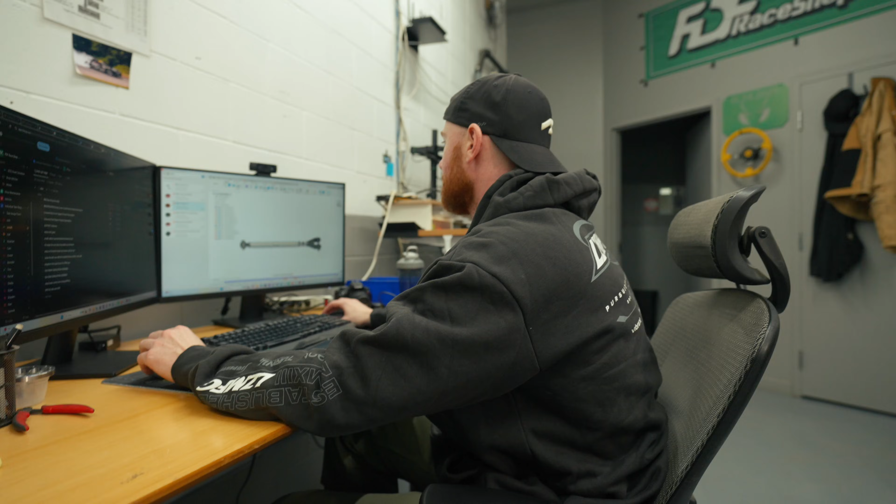Dude, we haven't done a design time since last year. The kids already got on that one. They're like, you haven't pulled us on the sled in a year. The kids even got the jokes.

I'm gonna make a quick axis through this. You could actually film this as part of design time. We might as well actually do something that shows a bit of the design. You're gonna be shown a really big mistake too, which is cool.

I didn't officially build anything, so it's totally fine to run into problems with your designs because you can still fix them, right? So you gotta run through the simulation, make sure there's no interferences, and we found some interferences because I slightly jumped the gun, although I was kind of just trying to get a model in place so that I could use it, but you're gonna find what I'm talking about here.

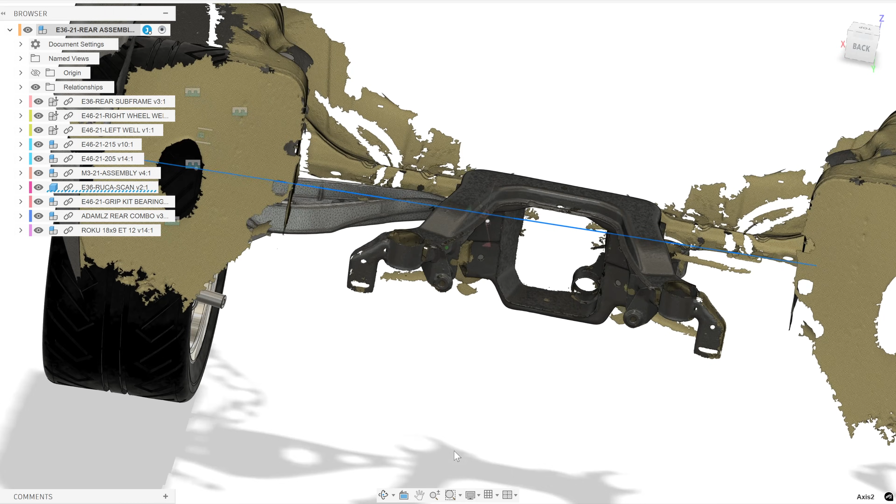We want to have axes traveling through the control arms. And the reason for that is so we can view roll center, converging lines, intersection points, anti-squat, all sorts of things that are gonna look cool and behave so that we can actually follow these and track them and trace them and graph them basically. So I'm gonna just create an axis through this control arm.

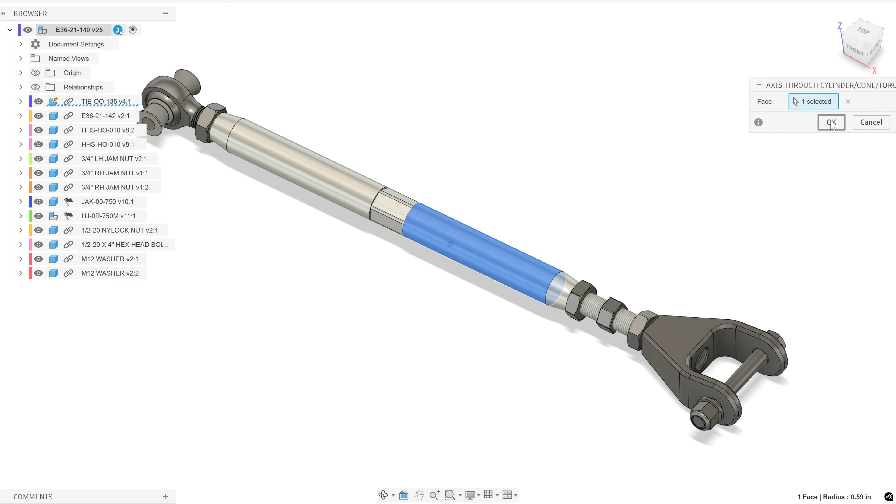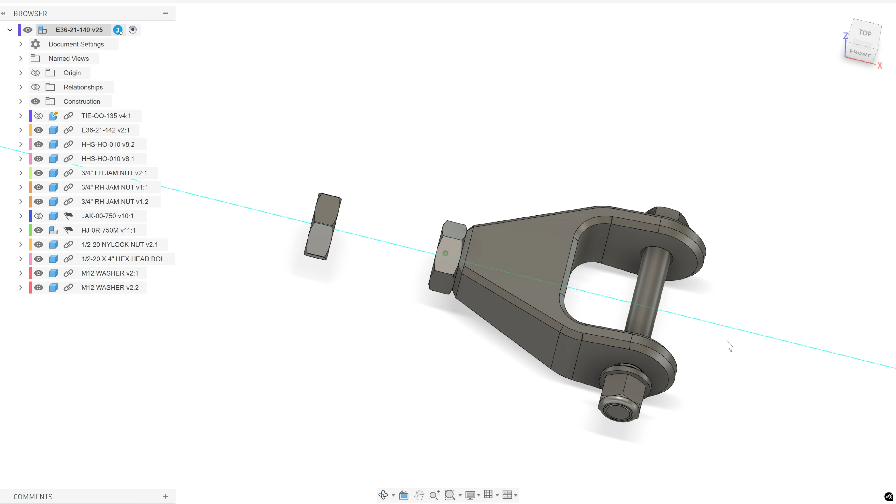Typically, control arms are a little bit harder, like if you're dealing with an OEM control arm and a scan file, but because this arm has many circular parts that are all in line with its axis, we can really simply just put an axis through cylinder, basically like this, and you can see this construction line here. So essentially I can drag the axis longer and we can get our lines. Sometimes it's hard to click on them. There we go.

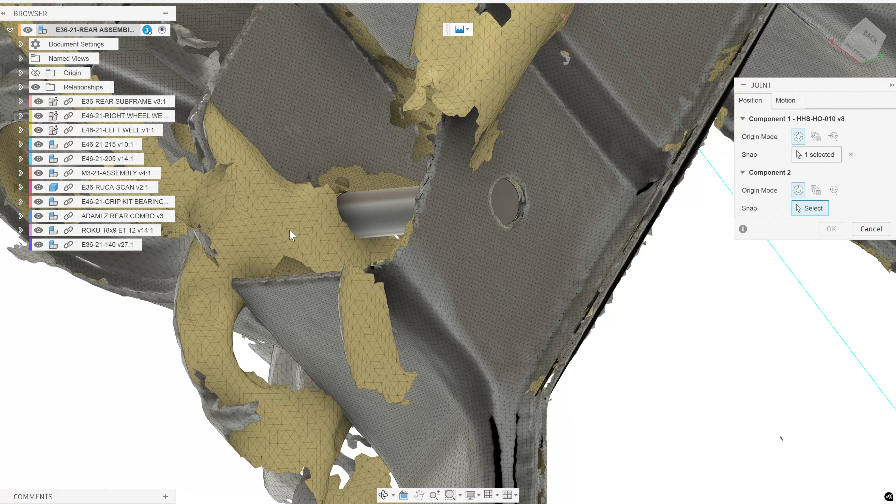Okay, so we have our axis through the line, so we're gonna save that, drop it into our assembly, we bring it over, and we can now joint this control arm as if we were bolting it into the subframe. So we'll put the spacer where it needs to go, here. And then we will put the control arm onto this spacer as if we're bolting her in.

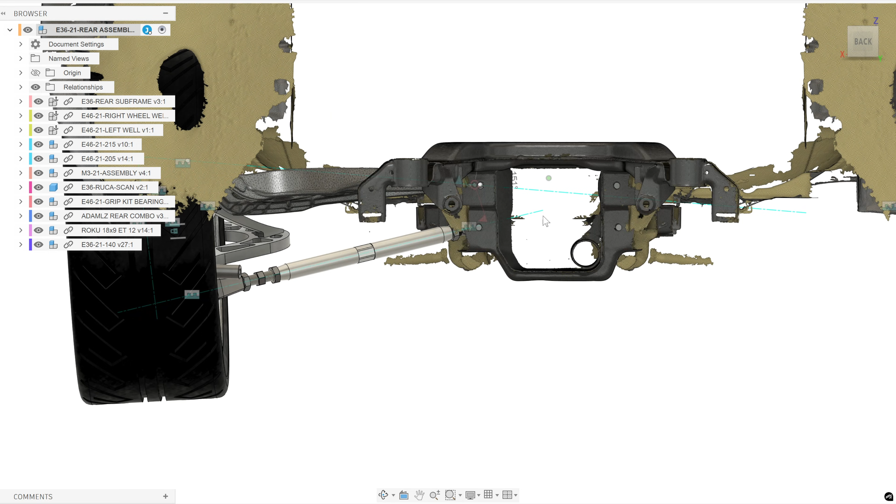And we now have some nice converging lines. And I can just drag them longer. You can see the intersection point here. If I move the wheel, we can easily track where everything's going. Cool, very cool. You can see how the BMW behaves.

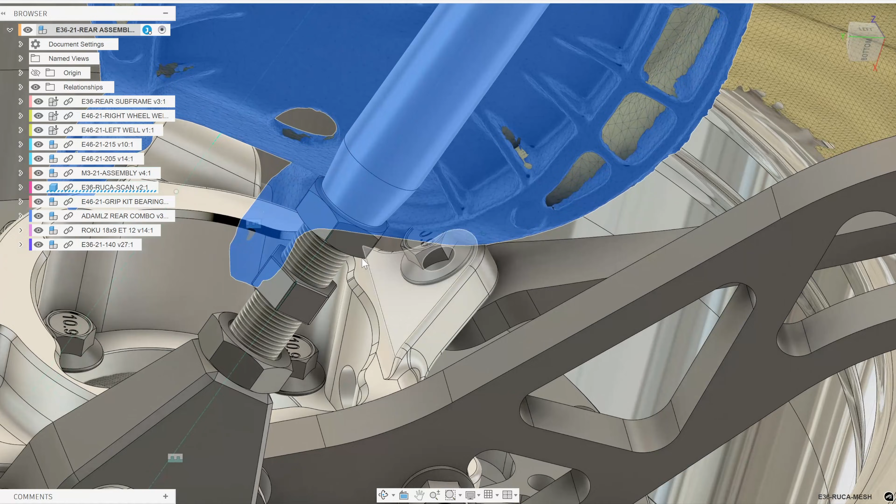But the problems, like I said at the beginning, we have a couple interferences. We have this slight interference with the upper, which our upper control arm cleared perfectly fine, but Adam runs the OEM upper and he intends to continue to run the OEM upper, and look at that. The OEM one doesn't clear. So this, boys and girls, is why you gotta simulate way more than what you think in order to have the result you want. The other thing is this interferes as well.

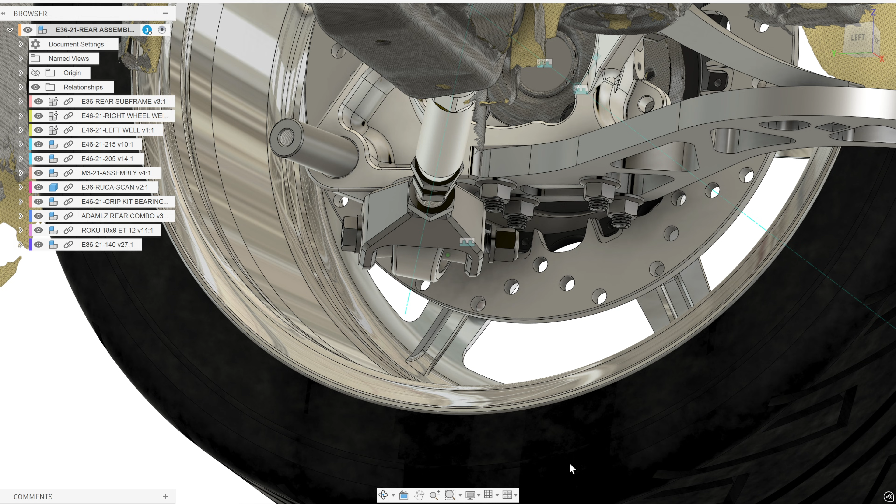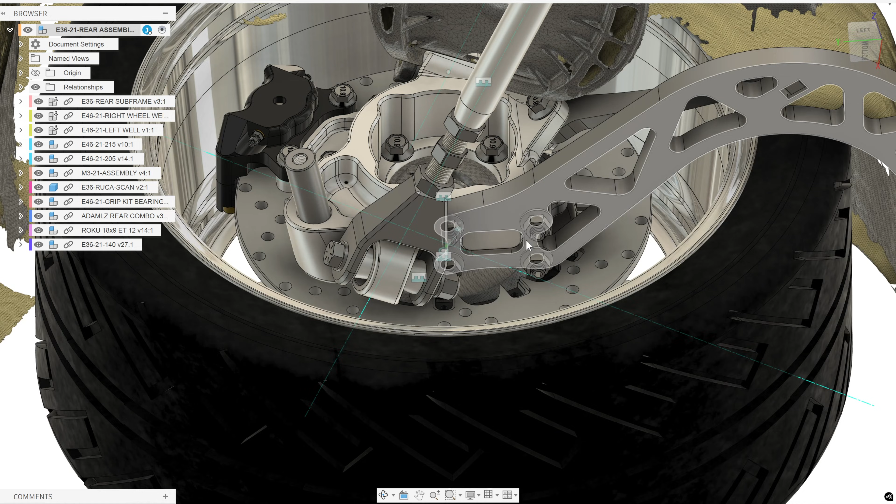Now, because this is on an articulation, if this was a bushing like it is factory, it probably would be fine because the bushing doesn't have much articulation, so the arm won't rotate very much. But because this is on a ball joint, it will likely run into this, so I have to actually move this somewhere else. I need to move it over in, 10 millimeters or something. So two relatively easy fixes, but otherwise, the whole assembly is really, really nice.

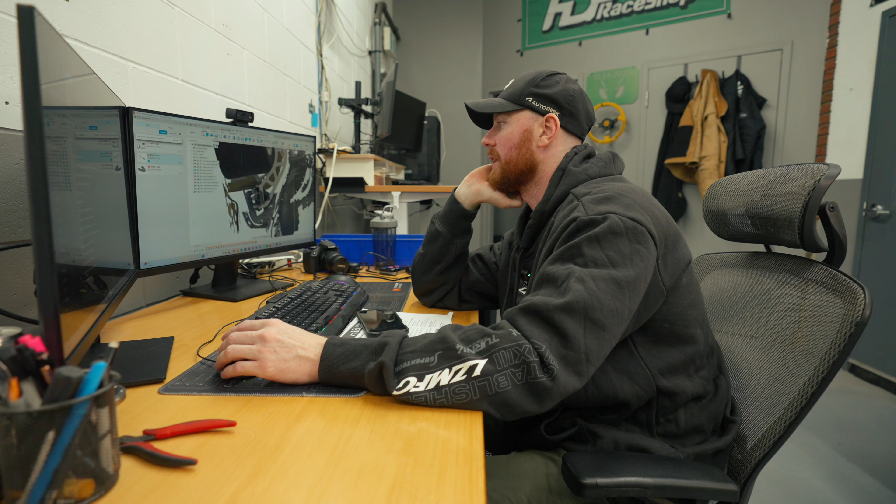We have our toe adjustment point here that has lots of room. We're gonna be able to clear everything. Adam was telling me, or the team was telling me, they prefer to max out the toe arm bucket here all the way toed in, because impacts typically slip these joints anyways. So they want to max this out on the inward position, and then they want to have additional toe from this point.

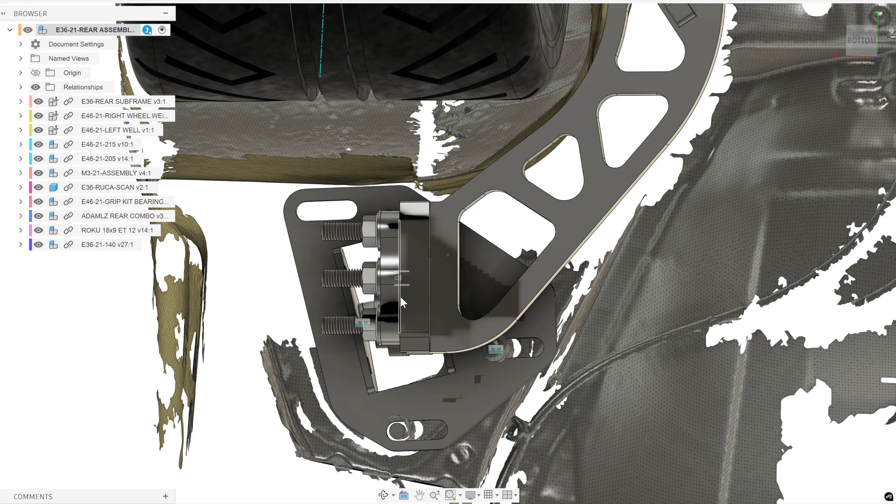So the additional toe, I'm not going to say what they run, but they basically run a fixed point and they are happy with where that is when these are all the way in. So we're going to allow for more toe from there. So if I unlock this, we're able to get that toe adjustment, and you can really see the toe change here.

So that's an additional amount of adjustment that they have, and I'll just relock that because it kind of makes the simulation a little tricky. And yeah, that's basically it.

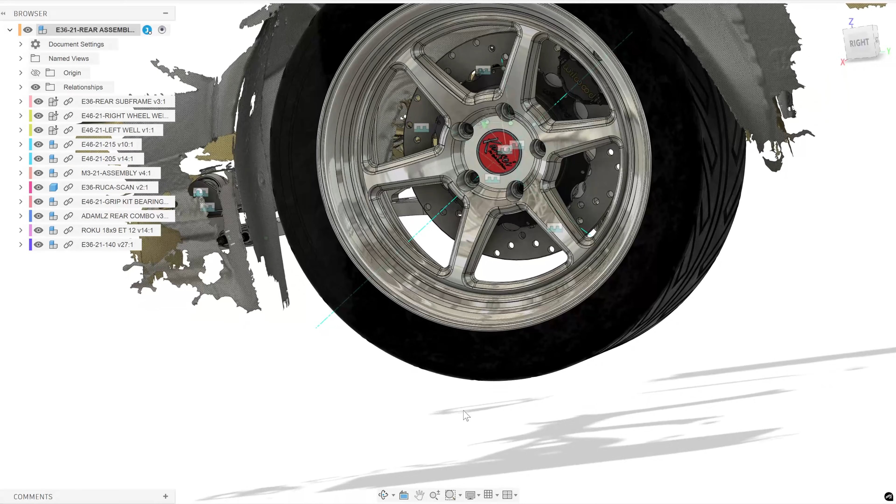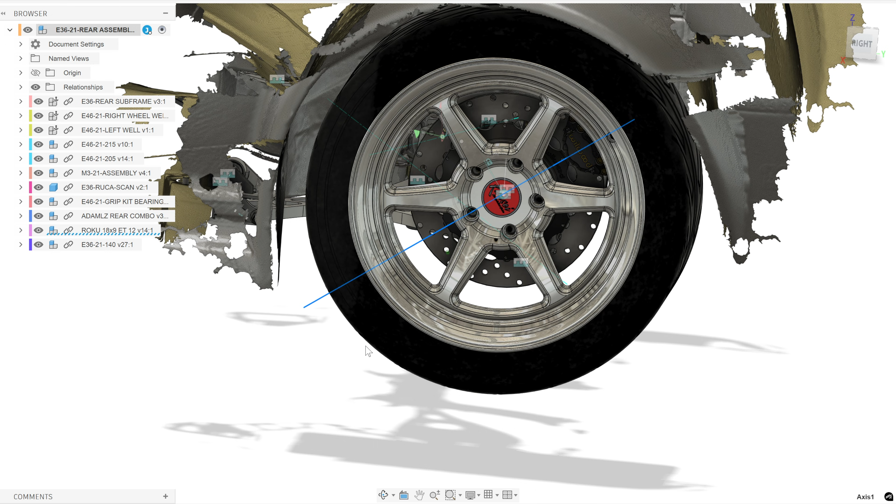One thing I need to figure out how to do, which I will figure out, I just haven't done it yet: I need to somehow have a constraint that keeps the axis of the wheel intersecting the ground plane. I might be able to do this with some kind of a constraint. See this axis here. This is what I want to always point down, so that that's my tire contact position, so that I can trace additional kinematics and find more converging lines.

But I haven't figured out how to. Obviously I would put a revolute constraint on the wheel so the wheel can actually rotate, but I need some kind of a constraint that keeps it pointing down. And because the tire changes camber, changes toe, changes everything, I can't just simply make a contact patch flat with the ground, because it'll never be flat. It'll never be always perpendicular or parallel to the ground. So that one's going to be tricky. I haven't figured out how to do that yet.

I might have to get with the Fusion Autodesk team to come up with an idea. It'd be really great if there was some kind of a gravity constraint where you could just apply an alignment so that this always aligns with gravity. They kind of have that with FEA and other generative design. There's always a gravity function to those, so it does exist, but I haven't been able to figure it out. So I know that may be above some of your heads, but maybe we'll get a comment where somebody's had to do something similar, because nobody's perfect.

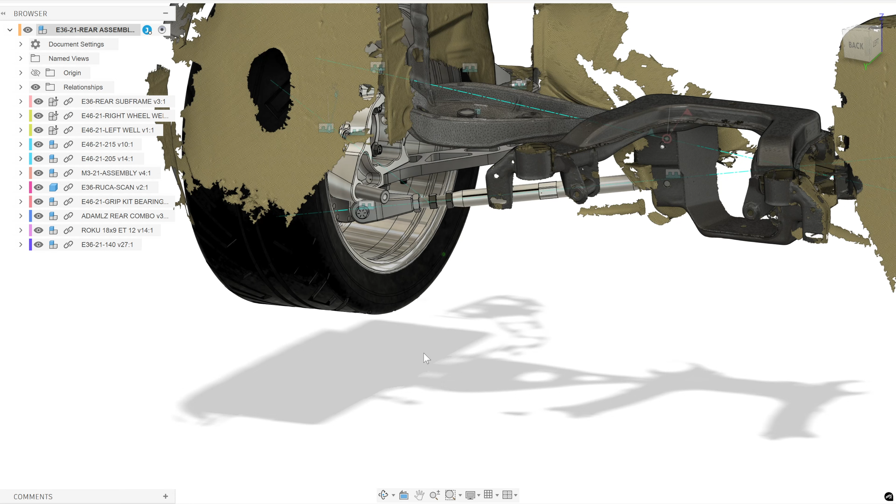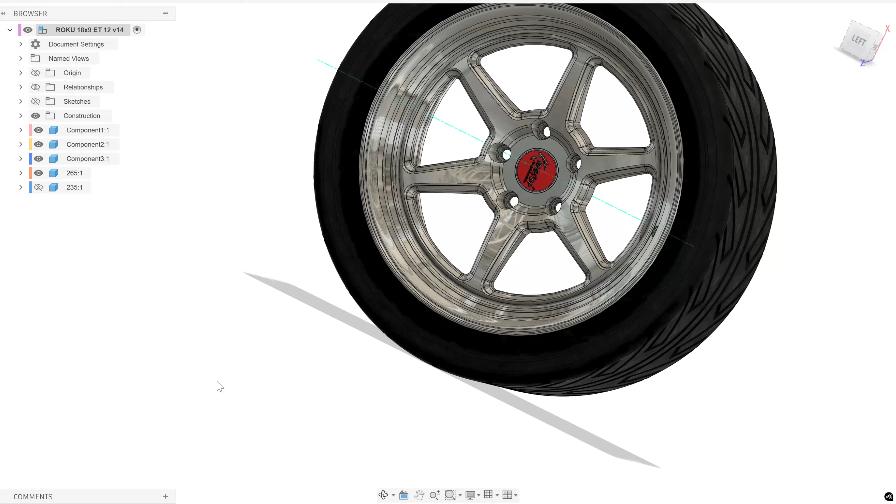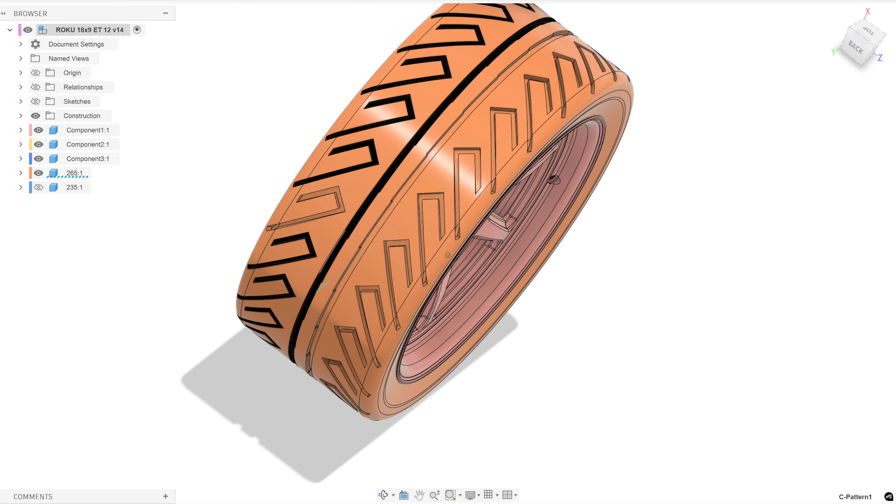As far as other components for design time, we have this wheel and tire. Let's open this up. This is pretty cool, this wheel and tire. So this is a patterned tire, basically went off of the Zeknova tread pattern. And it might be easier if I change the display settings. This is a tread pattern that I just created with a pattern, essentially. A pattern and then a mirror. So that was the easiest way to do that. And so it's an emboss, I had embossed one tread. So if I use the timeline, we can see this better.

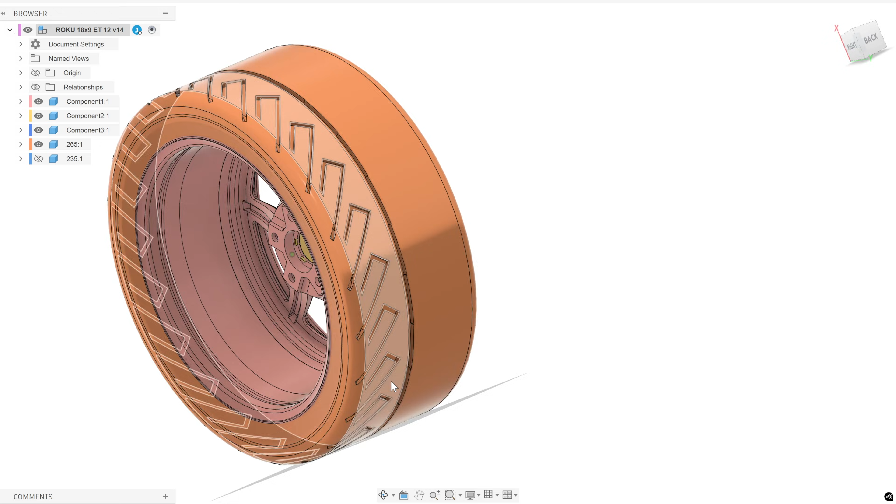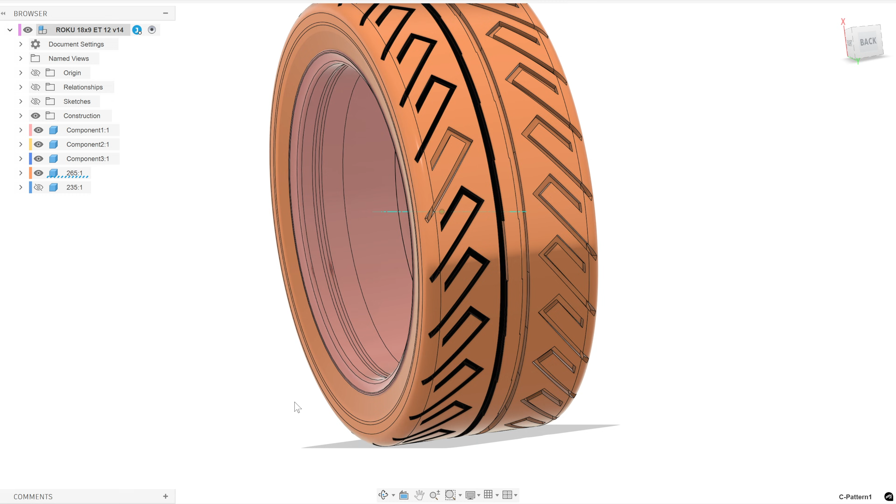So essentially I did an emboss of this one pattern, and then I created a circular pattern. And basically you can just specify how many you want. In this case, 23 is what looked the best. And then I essentially did a mirror plane, mirrored it, and that was it. So if you wanted to make a tread pattern on a tire, it's not that difficult. It's a simple sketch, emboss, circular pattern, and then mirror. Most tires have a symmetrical pattern. I know some do not, but if you want to do the same.

And then for the wheel, this was a CAD file from Kansei, signing an NDA obviously, and we're using Kansei wheels on all of our builds. It's really important to have the model and the size of the wheel, the barrel. We actually had to make knuckles that essentially fit perfectly to their wheels, and their wheels are interesting. They have a larger barrel than usual for an 18. This area offers more clearance, so I was actually able to fit and get some better kinematics out of the Corvette kit due to using these wheels.

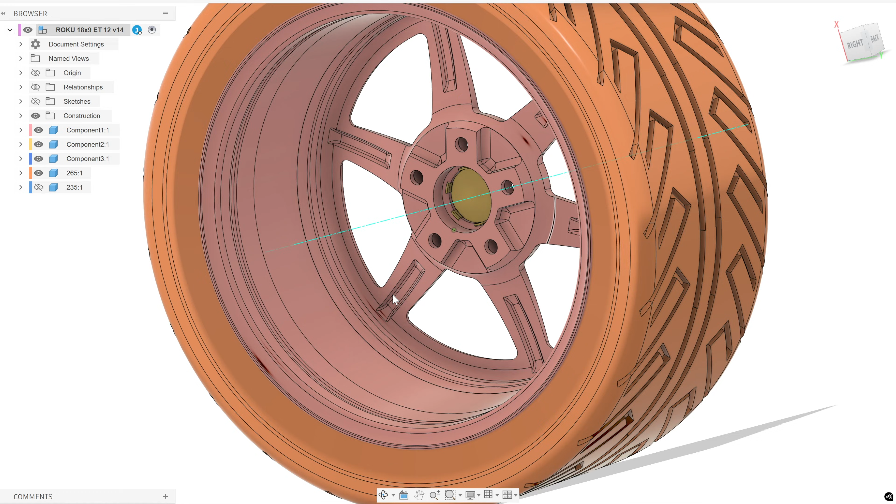And then there are some wheels that you actually can't run on the Corvette Pro kit, which is just an interesting point. I didn't know that until I started messing around with getting the perfect setup, that I think it was a Cosmis wheel won't fit because they use a different type of barrel. I don't know what the actual terms are, but I call this a tapered barrel, where it's got one defined lip for the tire to sit on, and then it's a tapered barrel all the way here, and then you can see it has a bit of a ridge just to keep the bead.

Other wheels have two of these defined ribs, and then they don't have a taper, it's just square in the middle. What are the purposes? I'm not a wheel designer, so I'm not sure. This one I prefer. This one seems to hold low pressures better as well.

As soon as you try to break the bead, it actually takes a while to break off this barrel. But if you have two lips like this, the bead can be broken quite easily. So mounting a tire on a Cosmis wheel or similar style is much easier, both dismounting and mounting, but on a wheel like this, it's harder to mount but it stays on better. I guess if you're a wheel designer, maybe someone like Kansei can comment on why they choose to do certain things for different wheels, I'm not sure. But I'm thankful they do it this way because it works well for all the stuff I needed to get out of the wheel.

I guess I should center this cap. That's gonna bug me now that I noticed it. We can look at this now.

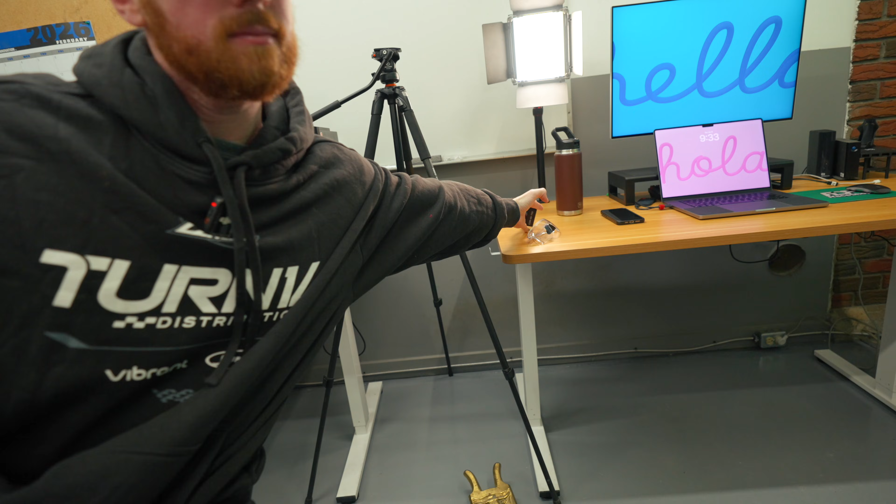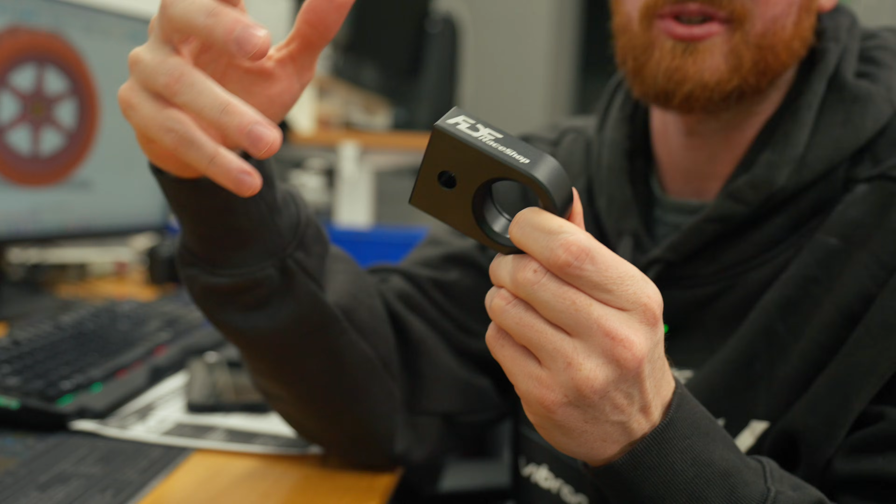We just finished these with some laser etching and part numbering. This will potentially be mass produced and sold to the general public as a solution. Essentially, whatever you do with a Heim joint, you can do with this, other than it doesn't have quite as much clearance as a Heim joint, but in a lot of cases this will fit just as well. It uses shim adjustments for all of your lengthening and shortening.

The purpose of shims is it uses clamping pressure and friction, and that's what holds it on. It's the same thing that holds your wheel on - the torque spec of your studs with the mating surface of the wheel against the hub, and the surface area of the bearing or hub face against your wheel, is what holds your wheel to the car securely, using friction and pressure. If you were to loosen all the nuts and just rely on the shear strength of the studs, you'll lose your wheel very quickly. Racing, you'll lose it almost immediately. Driving regularly, it'll probably wallow out all the holes of the wheel and shear off hours or days later, depending on what happens.

But that's why the torque spec of a wheel is so important. Same thing with this style of adjustment - the pressure you're creating with the two studs is what's keeping this joint so secure, and so much better than simply just a Heim joint.

This has worked well for a lot of updated arms we're doing for racing specifically, because the adjustment range - the only downside is the adjustment range is much smaller. Typically 15 to 20 mil is about the most you'll get out of it, similar to a Heim joint. But with a Heim joint you can just get a longer one, or make the threaded body longer - it's very easy. Whereas with this, you'd basically need to redesign the arm or make this block longer, because you can't have 1.5 inches of just stud hanging out - you're gonna induce a lot of bending, and you'll have stacked shims, and the torque of the joint won't be enough to overcome the amount of shims you have.

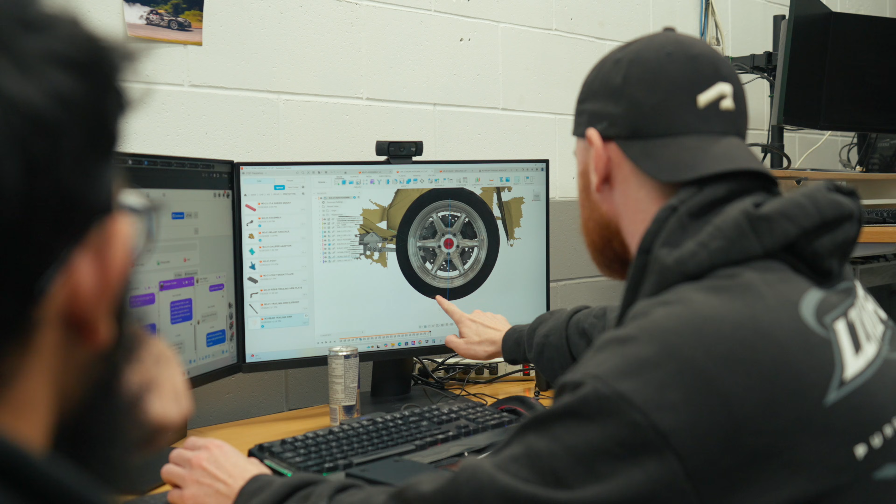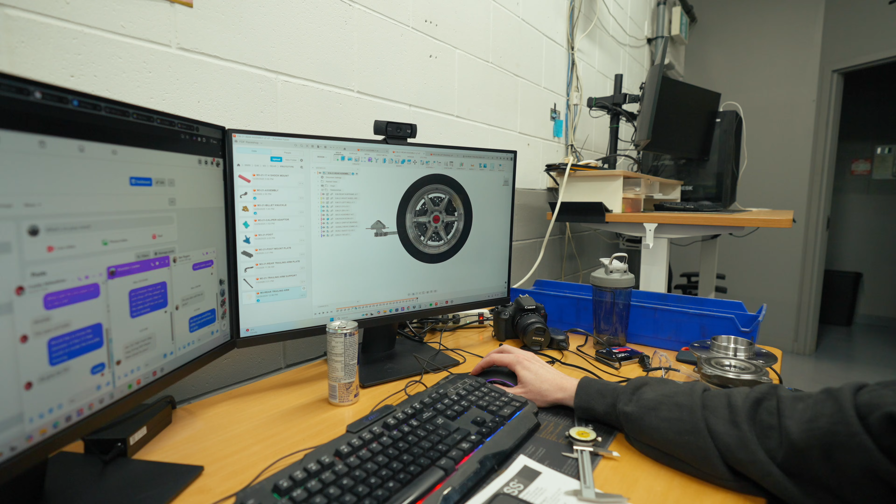I did an angular constraint from this axis to the origin plane here so that it maintains that angle. Now, constraints are relatively new within Fusion, these types of constraints, so yeah, really happy with that. That's sick. Let's hide this so it looks a little better. And then we'll hide the origin.

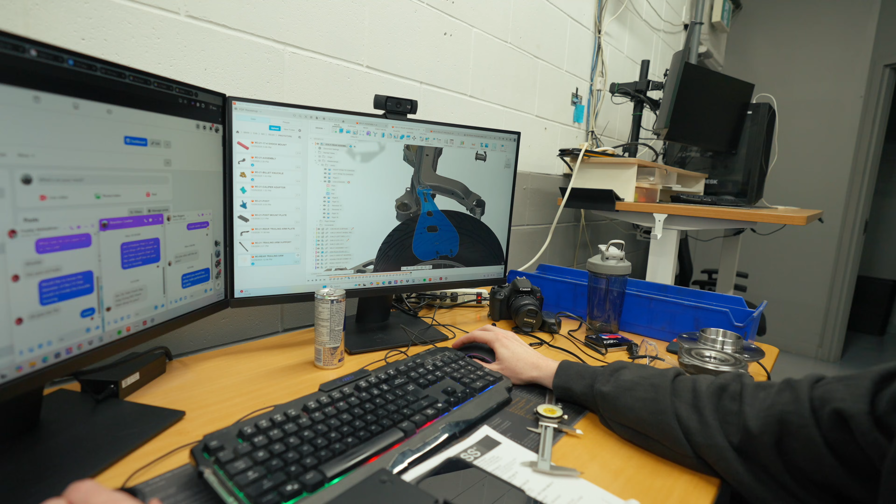Oh yeah, that is sick, really sick. Now I just have to keep this arm from rotating, which is much harder to do because the two ball joint components it uses are external components that we use in like a million assemblies, so I can't put a yaw constraint on it. Basically this upper doesn't rotate because I put a yaw constraint - I locked it on the ball joint. Anyways, that's too much information. I'll figure that out too, but the most important one was that the wheel would maintain contact with the ground, and I did that, so problem solved.